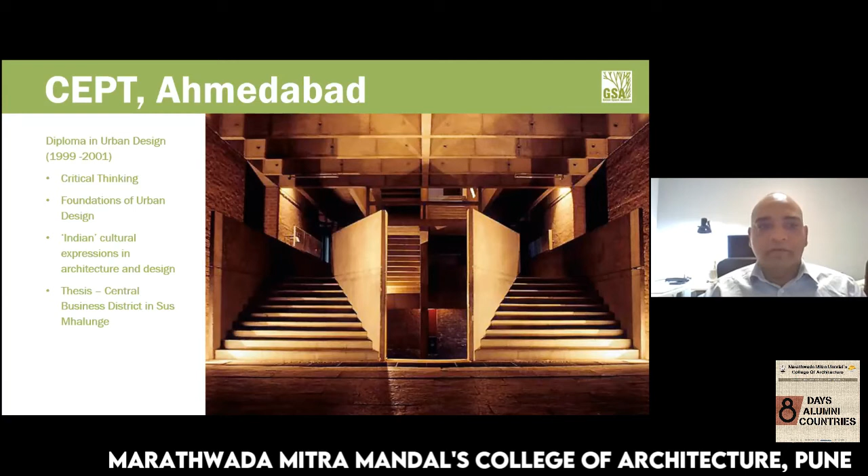When I did my diploma in urban design from CEPT, I did my thesis on a topic called Central Business District in Sus Mhalunge, near Pune, because Pune is my hometown. I'm just mentioning the topics I chose in my thesis to give you a perspective that I started with architecture, but then went on to discuss broader aspects in urban design.

From there, in 2001, end of 2001, when I finished my urban design diploma, I realized that I have traveled extensively in India. I understand how architecture works, how urban design works, but somehow deep within, I felt I need to understand how city planning works in general, and how exactly those architectural decisions we take are influenced by broader decisions, like how zoning bylaws are written and how municipal policy planning happens.

So with that desire, I decided to take education abroad, and I was fortunate enough to be part of McGill University in Montreal, Canada. Before I moved to Canada, I had no idea about the culture and the way city planning happens in the Western world.

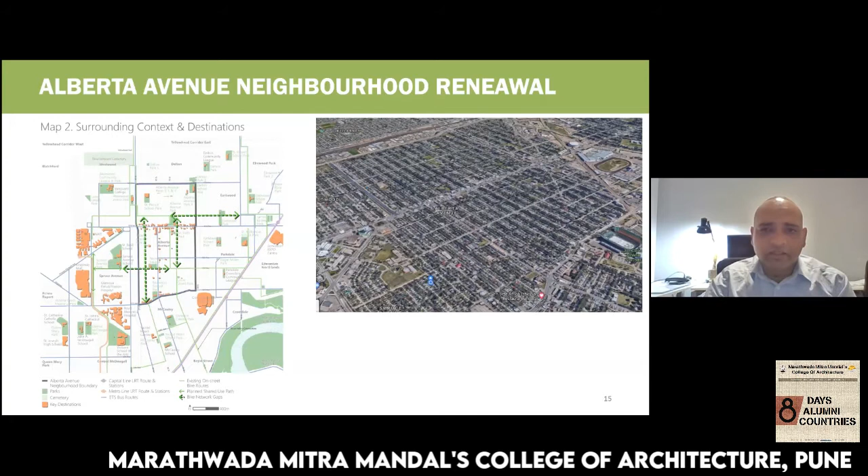At the same time, we came up with an urban design framework for the neighborhood, and when we did, we came up with 4 different themes.

The first one is parks and open spaces - quite obvious, all these green spaces are existing green spaces in the neighborhood.

We talked about the walking infrastructure, what happens near school sites, how people move through the neighborhood. Can something be done in terms of widening the sidewalks or improving the overall pedestrian comfort?

How the driving happens - is there shortcutting happening through the neighborhood? How do people move from other neighborhoods while crossing through this one? Is there a need for creating some sort of traffic calming to improve that pedestrian comfort?

Biking - where bike infrastructure is located in the neighborhood, what can be done to improve that infrastructure or put new bike facilities within the neighborhood. It's quite amazing right now in Edmonton.

The city council has decided to put dedicated bike lanes all around, providing that flexibility for citizens to take public transit, also use bikes to go to work or to recreate in your city.

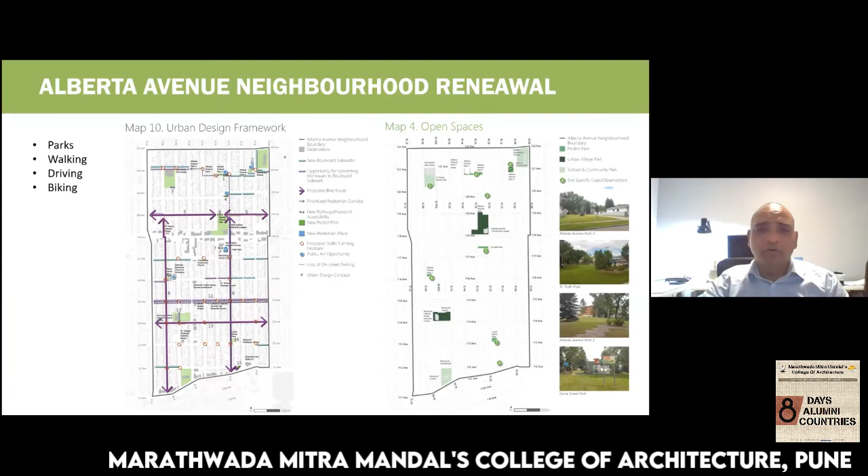As I was talking about improving the bike infrastructure, we came up with a strategy for how that infrastructure should be improved - coming up with dedicated bike lanes, separated bike lanes sometimes, and creating bike lanes in terms of shared street kind of facilities. So a variety of different bike infrastructure facilities will be installed in this neighborhood to improve that connectivity.

At the same time, we are also proposing some placemaking kind of initiatives. There was a small commercial area within this neighborhood, and we came up with a design to create a wider urban plaza with parking and improved public realm.

So as you can see, a lot of things I'm talking about from an architectural perspective might not be groundbreaking, but that's what I want to really stress - sometimes it's not about creating unique and earth-shattering architecture to make a place really unique and comfortable for citizens.

Sometimes it's really about making sure you have really nice sidewalks to walk on, trees everywhere, park spaces in close proximity to where you live. You can walk to your schools and to your commercial areas, and how all that works really contributes to the overall quality of life.

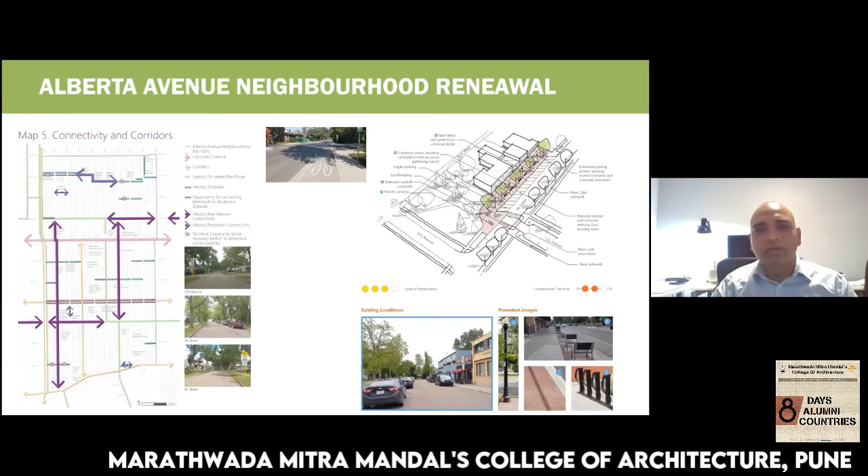That's one of the biggest lessons I have learned living in Edmonton and the Canadian context. We don't see a lot of unique architectural elements everywhere, but overall, the way the design works really helps in creating livable cities.

The second project that I want to talk about is Edmonton's Chinatown. The name of the project itself is Chinatown Urban Interface Plan. This is how Edmonton's Chinatown looks like. It's located quite next to downtown Edmonton, and it's quite a struggling area right now.

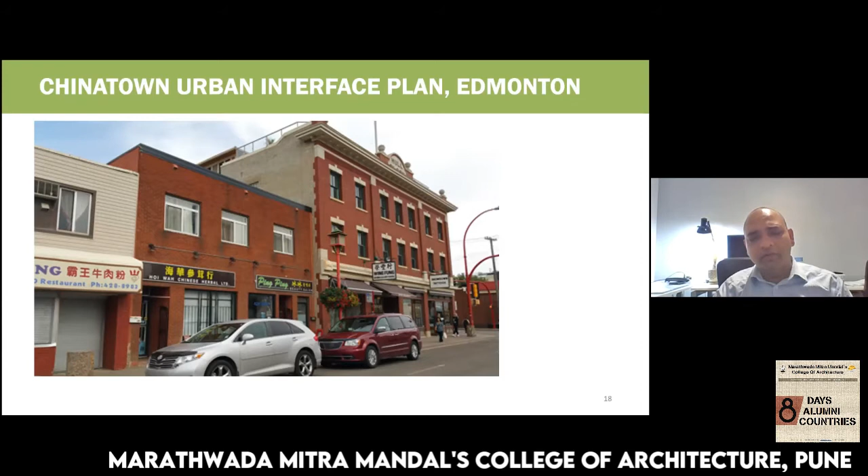It's an area in transition. There's a lot of low income population that lives in this area, a lot of transitional folks, so quite a tough neighborhood. The city of Edmonton wanted to transform this area into a vibrant place right next to downtown.

So almost 5 to 6 years ago, they hired another firm to undertake an economic development plan for this area. And that economic development plan came up with four key unique directions.

The first was developing a focused economic development area for Chinatown. The second strategy was developing or celebrating Chinatown as a destination. The third strategy was how can you enhance the built form, landscape, landmarks, and open spaces within Chinatown. And the last one was improving the sense of safety and security.

So those were really high level directions when it comes to economic development. And what we were charged to do at Green Space Alliance was to take a look at these four economic development objectives and come up with placemaking strategies to achieve that in Edmonton's Chinatown.

So we did extensive brainstorming sessions with municipal staff and key stakeholders in the Chinatown area. And as you can see here, all these bullet points that I have highlighted, we came up with a variety of placemaking strategies. And for something like this, we developed a diagram like this.

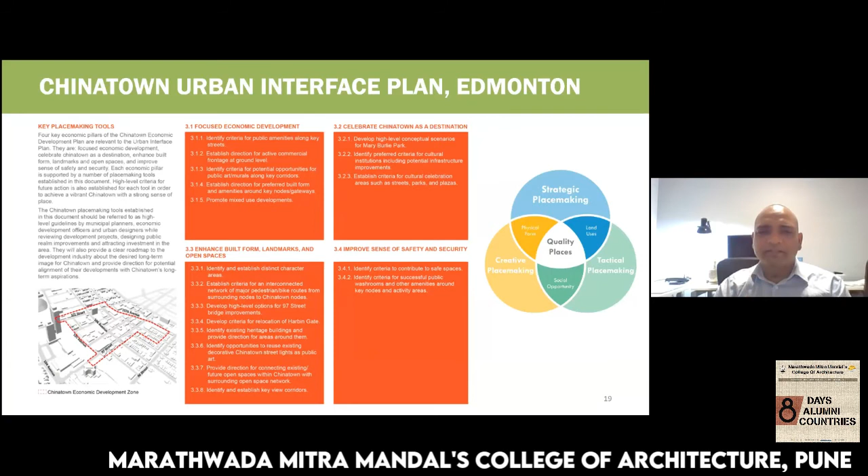So we really took that framework and tried to apply it in the Edmonton context. And really, the end result is how can we apply these techniques to create something to improve the quality of life at the ground level.

So what we did in this project, at a planning level, is we tried to define what urban interface means for Chinatown in this diagram and how it relates with all the surrounding neighborhoods in Edmonton. How can we improve that overall connectivity? And at the same time, how the interface happens in terms of public realm and private realm. So we really worked at both those levels.

And you can see in this illustration, because Chinatown is located quite next to downtown, one of the first strategies was how can we create a mixed use environment and how can we bring people to live in Chinatown so that in the end they can actually provide that land use mix in this area. There was a vision for coming up with lots of high-rise residential towers in Chinatown, and how can we make the main street right here quite vibrant at that ground level, like commercial, which is quite unique to Chinese culture.

At the same time, we also created a very robust strategy for open spaces, coming up with open spaces that are culturally sensitive. And we came up with a strategy to have that public-private partnership so that some of the open spaces might not be owned by the municipality, but they can be developed as part of private sector developments and made available to people to use as open spaces.

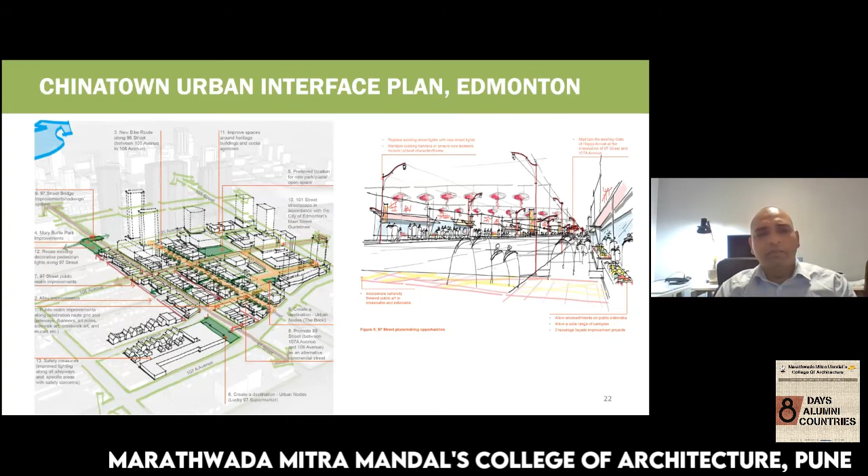But they don't get implemented 100% exactly as we envisioned, because the most important thing is you're trying to create a framework, and that framework gets implemented. The high level principle is kept intact, but the way it gets implemented might vary. That's the whole point in urban planning and urban design. If your framework is really strong, and it gets implemented in a slightly different way, it's all good, because you're still getting that open space connectivity, street network, and public-private interface implemented.

That's the second project. The third project I'm going to talk about is the town of Slave Lake downtown plan and urban design handbook. About 4 years ago, we were hired by this municipality. It's a small town located approximately 2 hours north of the city of Edmonton. It has a huge lakefront, and is surrounded by very thick boreal forest, as we call it.

Quite a unique setting. About 7 or 8 years ago, there were huge wildfires, and the majority of the town was completely burnt. They went through a massive redevelopment effort, and after that effort was done, they hired Green Space Alliance to develop a downtown plan for their town.

So we went there as urban design and urban planning experts. We worked with their municipal administration, their business community, and residents in general, to come up with a downtown plan that would guide the future development of that town for the next 10, 15 years.

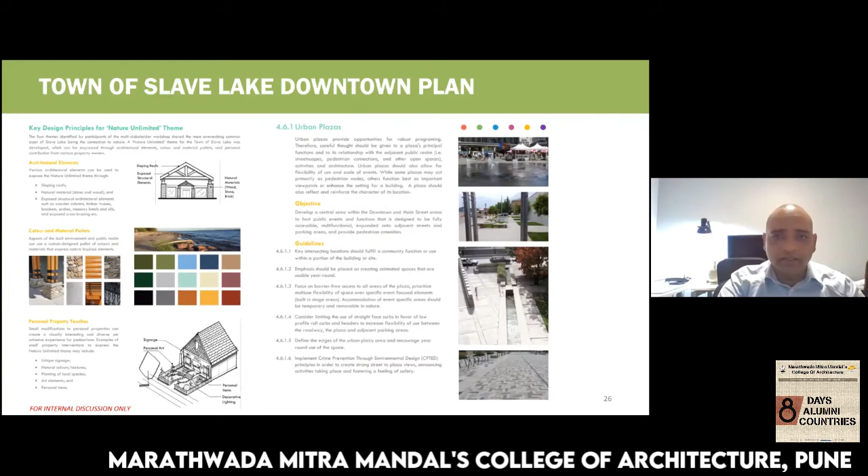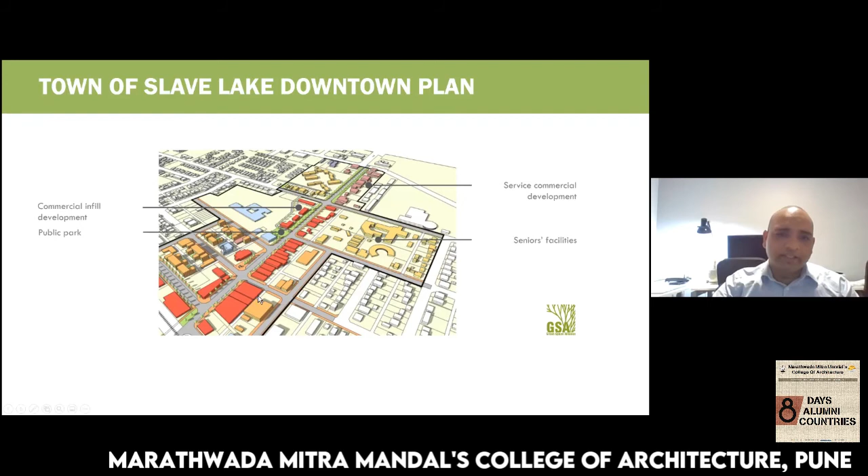At the same time, we provided detailed direction for various urban plazas that might happen in this town. So that whole framework was created, and this slide really talks about zooming in at the urban design scale, about how that streetscape and plaza design can happen.

Right now we are working with the town to establish a detailed design for this triangular plaza right in the heart of downtown. We're trying to create an inclusive space flexible enough to host a variety of events for people in downtown and also the regional population, because for this town it's not only the town but all the surrounding rural municipalities who come here for shopping and recreation. So we wanted a very flexible space that can host farmers markets and other festivals. This design is near completion now, and there's a possibility it will get implemented fairly soon, in the next year or so.

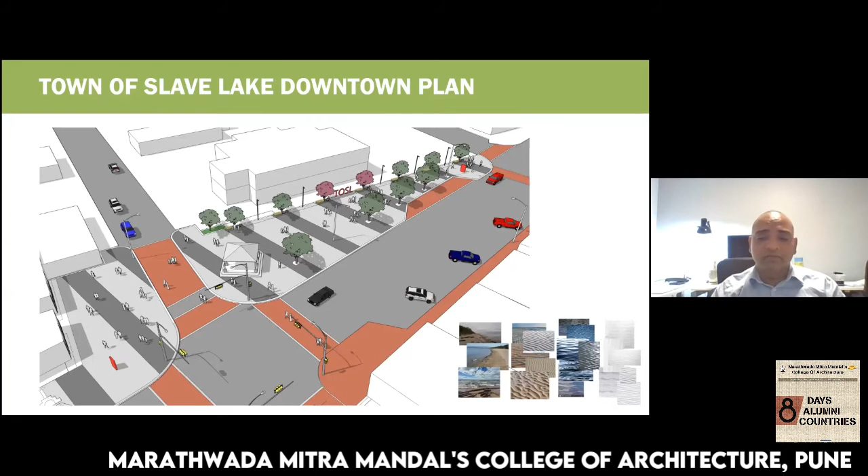Now coming to one of my last slides, developing land use bylaws. We were quite fortunate to work on almost 10 plus land use bylaws in Alberta. Many of them are for rural municipalities, like counties, incorporating thousands of hectares of land and a lot of agricultural context.

Today I thought—I had once done a presentation in Pune almost 8 years ago where I talked about Lac St. Anne County's land use bylaw that we developed. Again, the context is quite different; we talk about how agricultural subdivisions should happen in rural municipalities. At the same time, we worked with towns and villages in coming up with their land use framework.

This is where I was really able to apply the architectural knowledge and understanding of how architects design their buildings and spaces—what aspects are really critical in developing unique buildings, but at the same time buildings that fit with the urban context. They might not be architecturally completely different buildings, but how they really contribute to either rural or urban context. That experience has been quite valuable in coming up with these land use bylaws and overall frameworks.

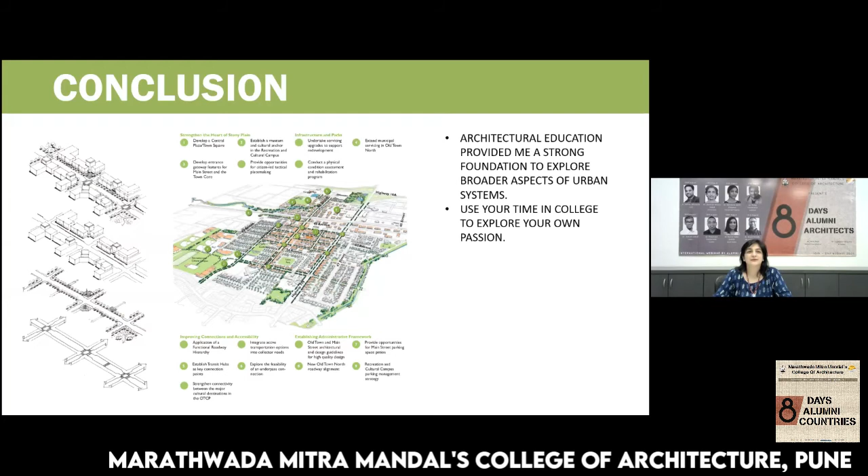Let's see—and Sudarshan, I know Sudarshan very well. Sudarshan was my batchmate, 1999 batch. So good to see you there, Sudarshan.

I think to answer your question, I have two answers. In Edmonton, what we have done is they have this numerical system for roads—101 Avenue, 101 Street, and so forth. So the entire city is named, when it comes to streets, using numerical names, which really helps when it comes to orienting yourself in the city because it's predominantly a grid iron pattern. But when it comes to the suburban neighborhoods, we have a combination of numerical names and also specific names, as you mentioned.

Cities in India definitely have a unique history, sometimes hundreds or even thousands of years, if we're talking about really old cities. So we have that privilege of having that history and heritage so we can have these historical names. But one key thing I was part of when I was at the City of Edmonton: for all new developments in the city, and in general bigger municipalities in Canada, there is what is called a naming committee. At the City of Edmonton, it's headed by a planner, with a small staff of 4 or 5 people working in the municipality.

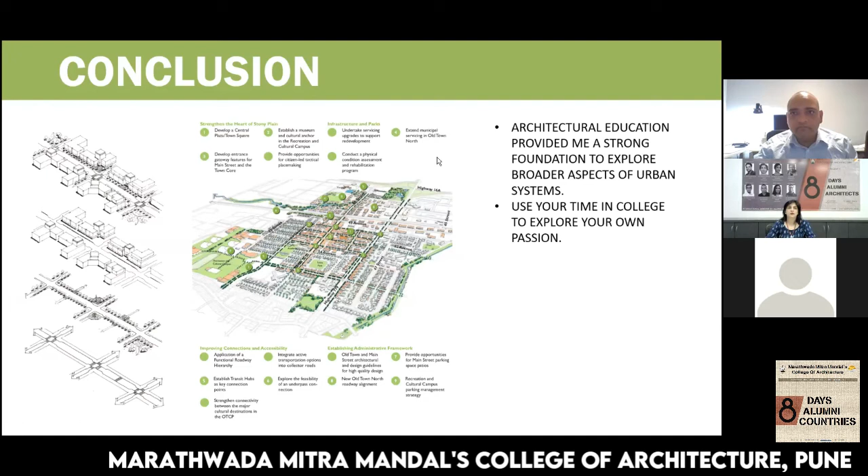Okay, there's another question by Sachin Vaman. Hi Dnyanesh, hope you still remember me. So good to see architects successfully working as planners.

As per my understanding, the planning process is mostly a 2D exercise in the Indian context. But architects and urban designers working as planners actually bring in the third dimension through their visualization of space-making capabilities. My question is, how in the Indian context can we bring in an integrated approach between planners, urban designers and architects for developer-driven projects, for a comprehensive place-making approach.

Perfect, thank you for the question. And yes, I remember Sachin too. I think he was from the 2000 batch, one year junior to us. So I definitely remember you.

When I think about how urban design and urban planning can be implemented in the Indian context, and especially integrating that third dimension, what I feel is — we were fortunate enough at Green Space Alliance to work on Amaravati's urban design framework a few years ago. My partner Dheeraj Patil was leading that exercise.

What I have found is, at the planning level, the development plan is done, which is, yes, a two-dimensional kind of exercise. And when it comes to developers implementing those plans, I think what needs to really happen is at the urban design scale, planners and designers can come together. What is really lacking, in my opinion — and that might be my perspective — is how a particular development really fits with the surrounding context. I see lots of renderings when developers are selling their development projects, especially at the architectural level, with lots of towers happening.